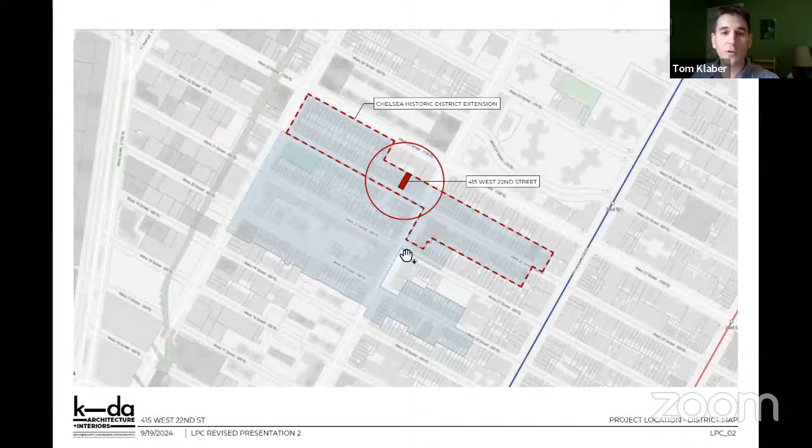So we are located in the Chelsea Historic District Extension on the north side of 22nd Street, between 9th and 10th Avenue, closer to the 9th Avenue side, on a block that is composed of many similar sized buildings. There's a notable bookend building to our east, and then the north side of the donut is out of the district on the south side of 23rd Street.

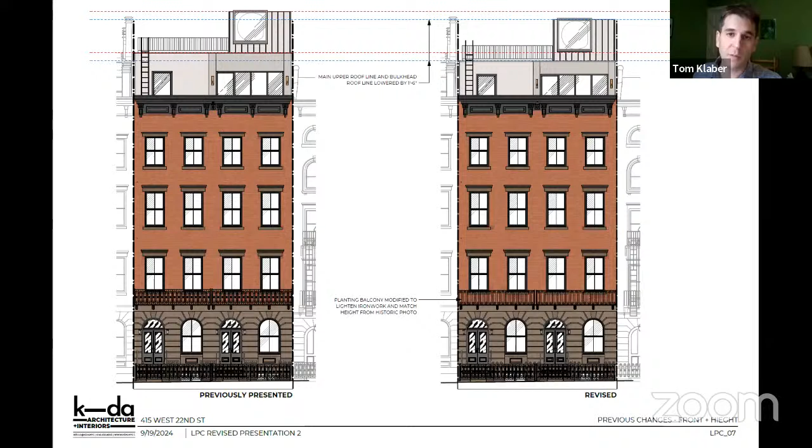So again, to recap the changes that were already made to this proposal, the front facade restoration work, including the changes to the front areaway and restorative work on the front facade, was all supported by this commission, as well as our interpretation of the roof addition, which was supported by this commission after we had lowered it by 18 inches.

The other major change that we had made was the preservation of the internal brick party wall for the first 15 feet of the project on the first 4 floors.

The major change that we had made between our first presentation and our last one, in the rear, that will carry over to today's presentation, is the removal of the 3rd floor extension to bring the entire building above the parlor floor back to its existing building line, and the removal of the floor to ceiling windows on the third floor, and the change of that material back to brick, along with the windows being kept at their original size.

So to take a look again at the existing condition of the rear facade and its relationship to the neighbors, the most notable features to our east is that 20-foot extension at our neighbor at 411, and the balconies at 417, and the fact that 417 extends out past us, and then 419 and 421 extend out further.

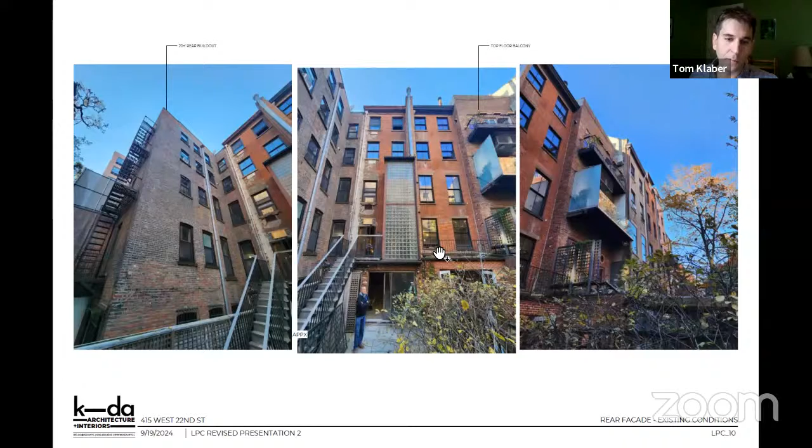A bulk of the work that we've been doing this past month is working with the engineers, the structural and shoring engineers, and the contractors to determine the viability of the preservation of the top 2 stories of brick. We've determined that the facade is in fair condition and is viable to save the top 2 stories.

The condition of the brick behind the chimney is an open question, and there will be some required repointing in sections based on the condition of the mortar on the interior. But overall, it's in fair condition, and the current plan is to preserve the top 2 stories of brick, and then use salvaged brick from below to fill in the various air conditioning openings and any other places that need patches and repairs.

So here is the revised proposal, and we will look at the specifics more closely now.

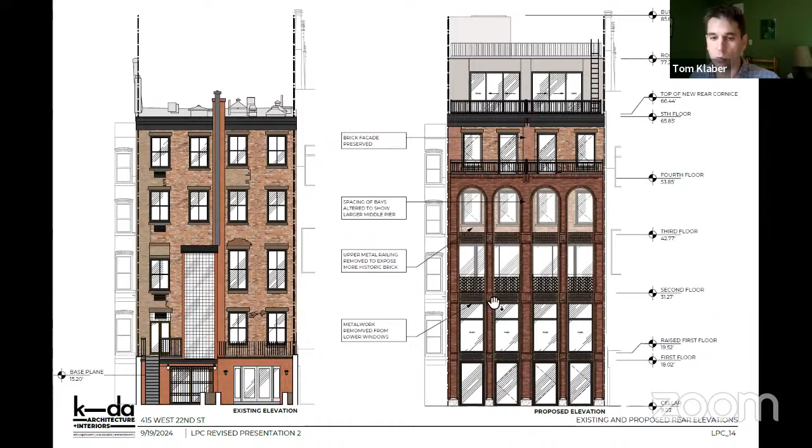So now we can cut this extension away, and we can see again that we're just proposing a balcony on the 2nd floor and a balcony on the 4th floor, and that these 2 top stories are being preserved in place, with the 3rd floor windows being kept in their existing openings.

On the 4th floor, we are proposing to lower the 2 center bays down to create doors out onto that deck. And we are proposing to slightly raise the header heights of those windows to maintain a similar relationship to the cornice, which, if you remember, is being raised slightly as a consequence of the flattening of the roof.

So if we compare this to the previously presented, again, the major change is the preservation of the top 2 stories in place. We've also scaled back the detailing around those windows to better match the existing lintel and sill details.

We have again lowered that top story by 6 inches, and we have removed the decorative metalwork in between, and then reorganized the rhythm of those bays to create the 2x2, all in an effort to lighten up this rear facade.

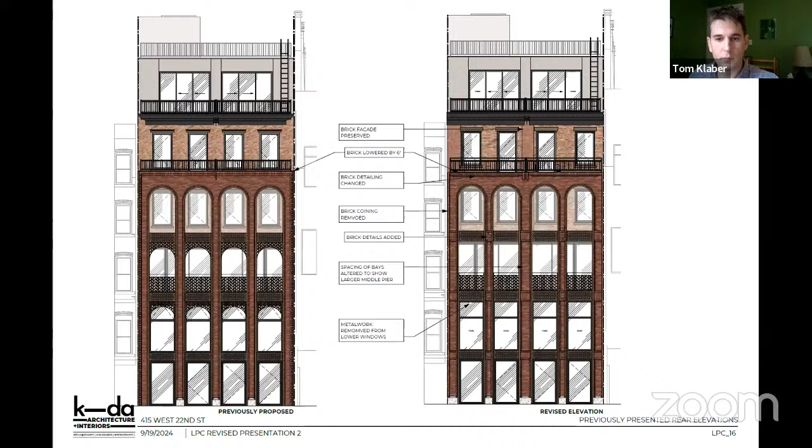The materiality has stayed the same, except obviously rather than reclaimed brick for the top 2 stories as we were previously presenting, that's going to be kept in place and repaired and patched as required. We are proposing here to have stucco for the rooftop addition, and then red brick with the bronze steel metalwork in between.

Here, a conceptual rendering showing the existing versus the proposed.

And here we can see the previously presented and the currently proposed. You can see the simplification of the brick detailing around the outside to help lighten up the overall composition.

So I was told to keep it short and sweet, but be happy to answer any questions.

Great. Thank you very much. It was very well presented. All right. Any questions, commissioners?

Yes, Commissioner Ginsburg. I have a question because it seems to me that the structure from the second to the fourth floor is all a screen, and it does support the balcony up at the, I think, call it the fourth floor. But besides aesthetic preference, is there any reason that all of that masonry frontage is there?

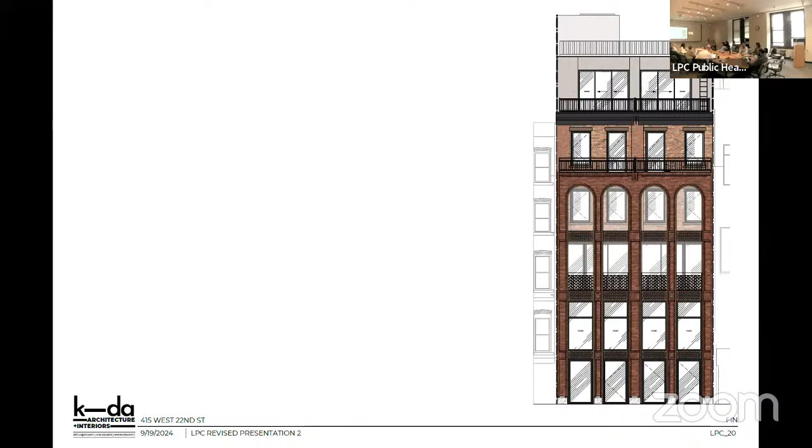If you turn to page 13... I mean, to me, well, that's a fine page too. Or go to, if you look at even what it looked like before, which was a little problematic within context. Can we go back to maybe even before they showed us? I mean, it blended in better than what they have now.

Okay, I'm just trying to understand if it's the sort of the rhythm or if it's actually the height of the arcade. I think, maybe Michael, that would be a question for you.

I would say that this is a case where classical architecture and all of the baggage that it carries is brought to the rear, to a kind of non-classical domain, and it gives the building, at least this is my take on it, and I share the view. I think the view of the courtyard is good because it's such a visually laden image, a laden image of classical architecture that is frontal. And even all the modern ones that we see, they function in a funny way in the rear because they're clearly of a different era and of a kind of more informal quality because of the amount of fenestration. There's something about that very forceful, very well-known classical kind of arcade language that makes it both out of its time and out of its place. I don't know how to say it more articulately.

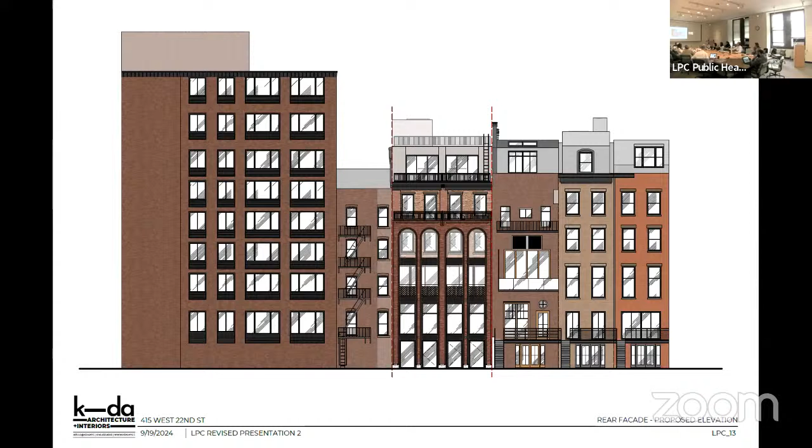Why don't you put up the three-dimensional rendering in the back? Put that one up, whoever's got the screen. Edith, could you move to a different rendering? There it is, yeah.

Yeah, that's what I think. So, if you're not comfortable, we can't vote today. So I think that's the question. Right, that was the thought.

So do you think you can't vote today? I could vote, yeah, I could vote. I mean, I could vote today, yes. Oh, okay, sorry. So then I think we can do a motion to approve.

So Vice Chair Bland, would you make the motion? I will. In the matter of 413 to 415 West 22nd Street in the Chelsea Historic District Extension, this is an application to construct rooftop and rear yard additions, install a cornice and balcony, replace entry infill and fencing, and remove portions of floors and the party wall.

I note that the building style, scale, materials, and details are among the features that contribute to the special architectural and historic character of the Chelsea Historic District. I recommend approval, noting that the proposed work will not damage or eliminate any significant architectural features, and that the installation of front balconies and fencing and the replacement of the modern cornice and entrance infill with elements largely replicating the historic features will help return the buildings closer to their historic appearance.

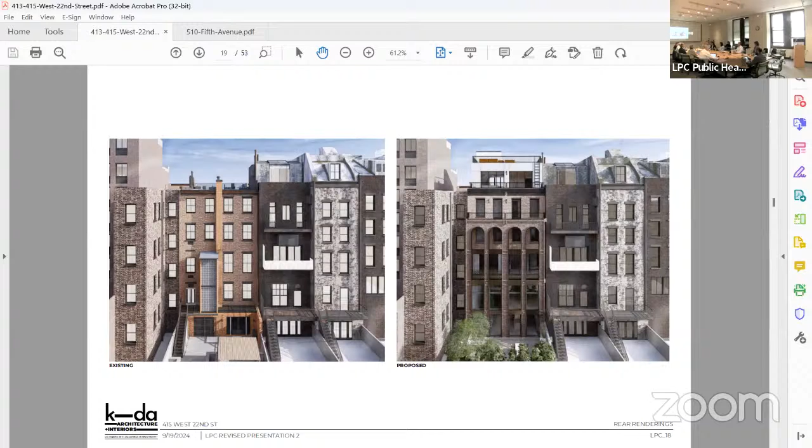We'll start with public hearing item number 1, LPC 25-01949. An application for a certificate of appropriateness in the Borough of Manhattan, Block 1258, Lot 40, 510 Fifth Avenue, the Manufacturers Trust Company Building, an individual and interior landmark. This is an international style building and interior designed by Skidmore, Owings and Merrill, built in 1953 to 54. The application is to install interior signage, LED screens, partitions, and fixtures.

Morning, Commissioners. I'm Cas, I'm with Beacon State Partners. Joined by our clients from Fast Retailing, the parent company of Uniqlo and GU, Hiro Izaki, who is Director of Global Store Development, and Project Architect Kevin Gore. My colleague Sarah Rickle is joining us remotely this morning.

We are presenting this morning a project for a new retail location for the retailer GU, a Japanese brand, which will be occupying the first and second floors of 510 Fifth Avenue, historically the Manufacturers Trust Company building. The project has been designed and developed with 3 key goals in mind, and particularly the first 2 tap into what are the character-defining features of this important landmark.

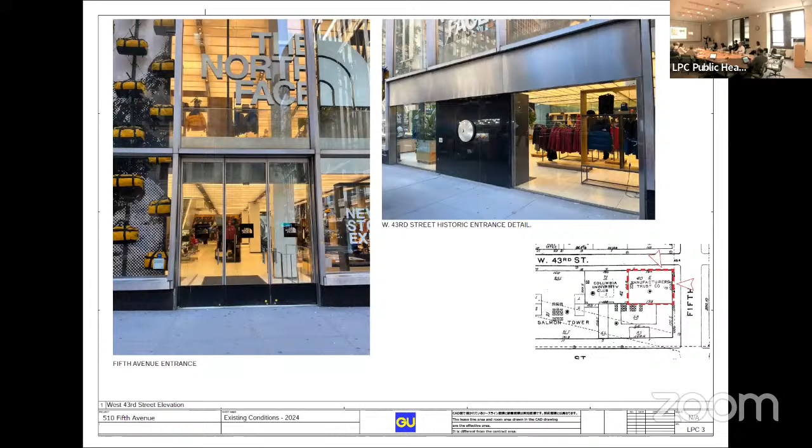And then on the 43rd Street side, the photo on the upper right - this was historically the entry to the building, so the orientation of the public spaces, the first and second floors, has been completely changed. Historically, this was the entry. There's that center granite panel with a night deposit vault drop, but the glass panels on either side were the entry doors, and there was an interior vestibule that led directly to a central escalator, which brought people up to the second floor. That has now been repositioned under the 2011 approval, and we'll talk a bit more about that in just a moment.

There is no exterior work other than decal signage on the doors, and all the work is taking place on the interior. I'll also mention that key to this proposal are enhancements to the artwork on the interior. There are two significant Harry Bertoia sculptures, and a key piece of this project and its planning has been to bring better attention and enhancements to those, which we'll talk about as we go through the proposal.

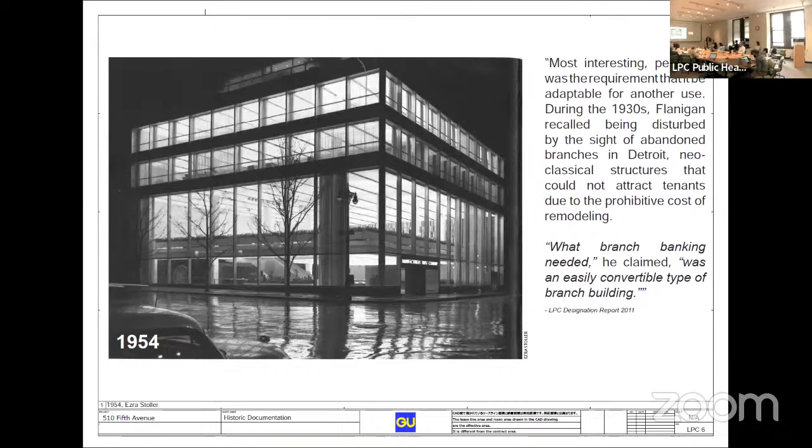What happened in 2010 or 2011, when the orientation and circulation of the interior was changed and the escalator was rotated 90 degrees, that sculpture stayed and today is in its historic location, but it's lost its connection to the escalator. Historically, you came in off 43rd, the escalator was directly in front of you, and as you went up, you saw that sculpture directly above you. Now the sculpture remains in its historic location, but the escalator has been rotated. So part of what we'd like to do as part of this proposal is reposition that sculpture, which actually left the building and came back, so it's again at the top of the escalator, giving you that axial relationship as originally intended.

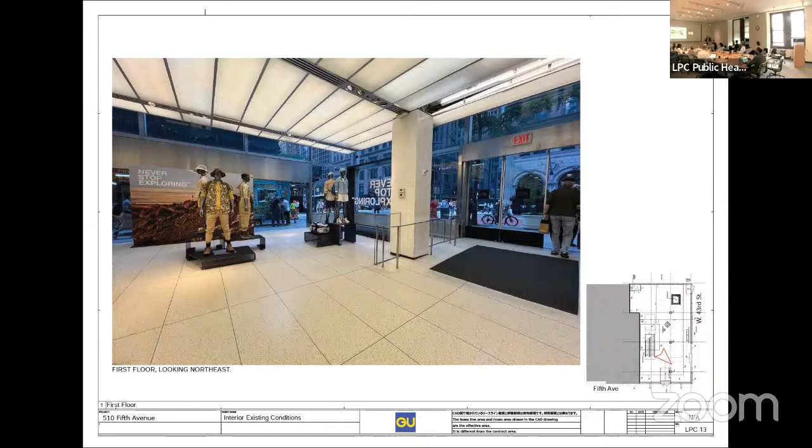So the ceiling I mentioned, that had been replaced in 2011. The floor also, the terrazzo floor, with the moving of the escalator and the condition of the floor, the terrazzo floor was replaced at that time too. So all of the flooring across the first floor and the second floor is 12 years old. The ceiling, the floors, and even some of the column enclosures, particularly those that were supporting the mezzanine, those too were reclad as part of that overall project.

This is a view now looking with your back to 43rd Street across. You can see the escalator now in its current location. Here you can see it in this little key plan, and then this partition wall separating the commercial retail space here, this space here, which is now vacant. There's a wall that divides those with a clerestory above to have some connection. But those spaces, that ground floor space, is currently divided in two.

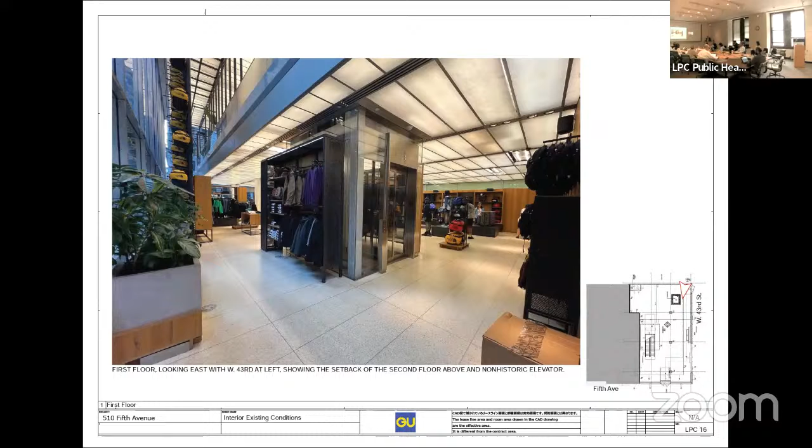And this is sort of looking at that slab edge of the second floor and the curtain wall just to the left of it. But you also get a sense of the sort of irregularity of the ceiling with that fluorescent lighting that exists throughout the space. And then the bank vault.

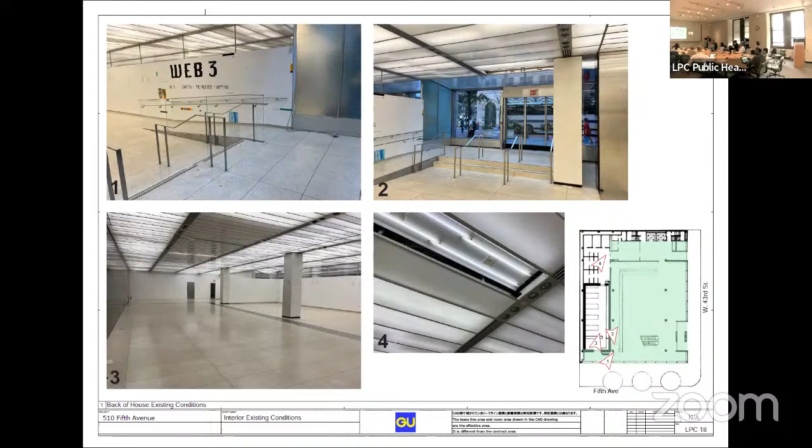Right now there's a black painted wall that's really hard up against it, beyond which is stockroom and fitting rooms, so you lose the transparency of that screen. What we're going to do is take that wall down and move it back for stockroom.

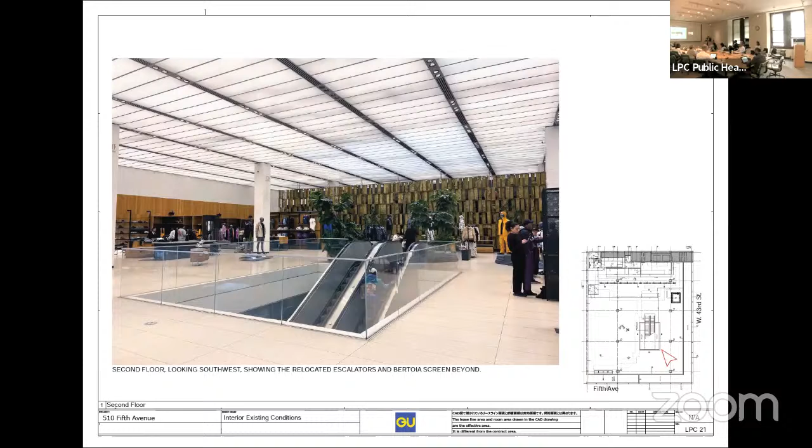So the relocation of the sculpture to the top of the escalator, and also the enhancements at the back of the screen, we think will be real improvements to the space. A few details at the corner, column enclosures, fixturing to the perimeter.

Some additional interior photographs at the slab edge, that glass railing also installed in 2011, so much of the interior fabric is actually quite recent. And then again, the Bertoia sculpture, that's that black wall I mentioned, right directly behind it.

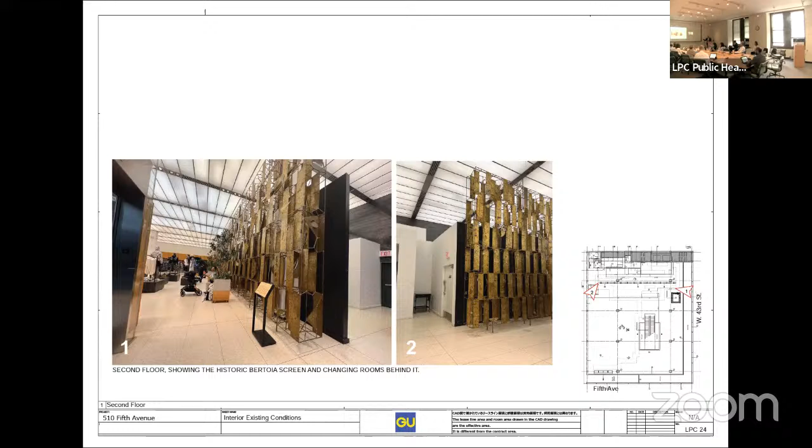As you saw in the historic photograph and plan, the idea was that there was activity on either side of that. There were desks on either side. So we're going to try and reclaim that as part of this effort. So turning to the proposal.

This is a proposed elevation along Fifth Avenue. As I mentioned, other than some small decal signage, there is no exterior work both on Fifth Avenue as well as the 43rd Street side. And the key has been to position fixturing where it is taller fixtures on the back solid walls, lower fixtures around the perimeter. All those fixtures are just clean, simple metal open fixturing.

At the second floor, you can see that on the slab edge. That's about 9 feet back from the facade of the building. In blue hatch is the LED signage that's proposed. It's aligned and tied to the slab edge and the column grid. You can see that in elevation, the relocated Bertoia sculpture shown from that elevation.

And then across the ground floor, you see mannequins. Those are going to come and go. There's no fixturing across the whole Fifth Avenue elevation, so you're seeing directly into the space and even at the corner.

The two key plans represent the first floor and the second floor. There's some small signage, 19-inch square signage that's proposed on the interior on that aluminum stainless steel frame at the entries, both at the two doors. But that's the extent of it. It really sort of serves almost more like wayfinding signage for pedestrians at the sidewalk level.

And then turning around to the 43rd Street elevation, this is the longer elevation at 125 feet. That's that corner sign we refer to as a cube, but it's really sort of an L. A similar proportion or organization, open fixturing along the interior edge of the second floor slab, and then fixtures at the ground floor. There's a secondary entry back to the back of the space, the key plan here, just proposing decal signage on those doors or small scale decal signage.

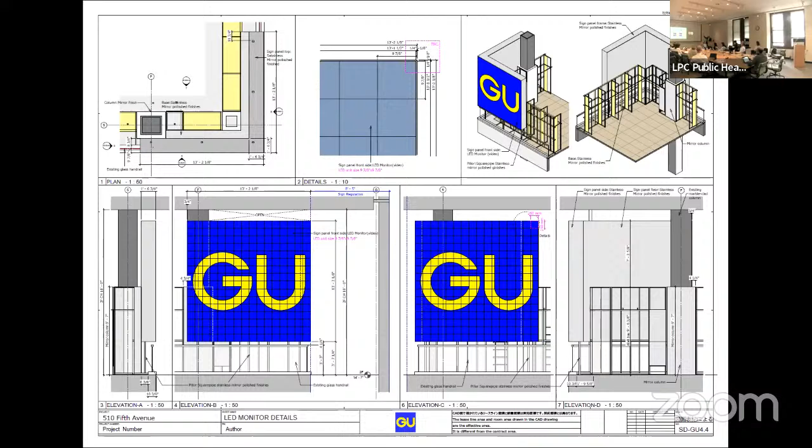So you see upper right, the axonometric views, how it will mark the corner. The column will be mirrored around the base for the retail use, and the current marble cladding all visible on the upper register of these columns, across all the columns on the second floor.

We did this graphic too, I think, just to illustrate again the proportions of these signs. It's interesting to think about the overall elevation at the first and second floors. Looking at the overall area of the first and second floors relative to the sign, this represents 5% of the overall area of each of these elevations—5% on Fifth Avenue and 5% on 43rd Street.

And I know you all, this is something that the commission is wrestling with, this kind of signage. But I think what's interesting is thinking about, I know you all reviewed a project in Ladies Mile last month, the month before, where there was LED video signage approved under that application. And those screens were 18 feet tall, about 6.5 feet wide, but they occupied as a percentage much more area than what we're talking about here.

And obviously the architecture, the international style modernist architecture is very different than that sort of 19th century store and loft structure. But in that Ladies Mile project, one of two bays was occupied by a video screen, so 50%. And on the Fifth Avenue side, one of eight, so 12%. So here, relatively speaking, this is actually considerably smaller in the overall elevation of this building.

And of course, as I mentioned at the outset, the sort of newness of this building, it's very different. It's an interior landmark. It's an individual landmark. It's not a building in a district, but I think the scale of it relative to the overall elevations is pertinent in this discussion. A series of sections now, just to illustrate, this is sort of looking through the escalator,

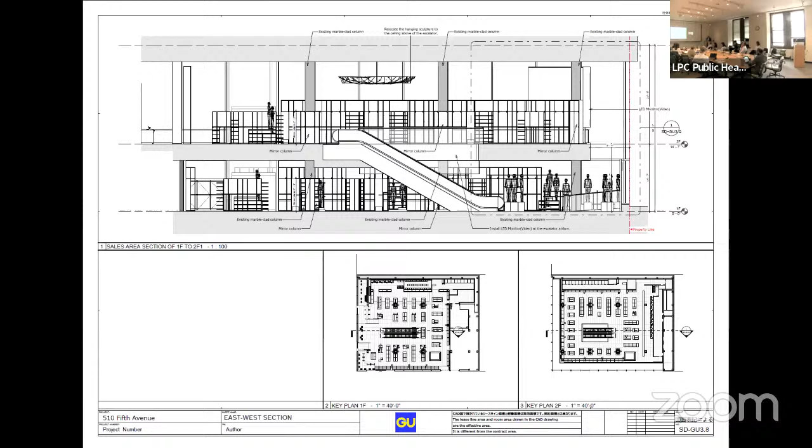the entry off of Fifth Avenue on the right, the repositioned Bertoia sculpture, and then the fixturing around the perimeter. Clearances above all the fixtures on the ground floor. The ceiling heights there are about 11 feet, so there's a little less clearance above those. And then the second floor where the ceiling heights are at about 20 feet, significantly more clearance above there.

Some details on the fixturing, sort of how they're going to be positioned around the columns. There'll be mirrors integrated into them. Lighting will be integrated into the fixtures themselves to minimize attachments and things like that to the columns. Speaker strobes, things like that, those will be required. We're working those out as to where those will be located.

Around the escalator opening, we're also proposing an LED monitor that would animate that section. So again, this is the new location of this escalator. So as you're passing from the first floor to the second floor, that interior slab edge, again, all new fabric, building fabric, that interior slab edge would have a video monitor around the perimeter just to bring a little bit of animation to this place of motion going from the first to the second floor.

Looking at some of the fixturing, some LED neon signage integrated into the fixtures for wayfinding and things like that. This is located in the back corner of the second floor, just to guide people around this fairly large floor area.

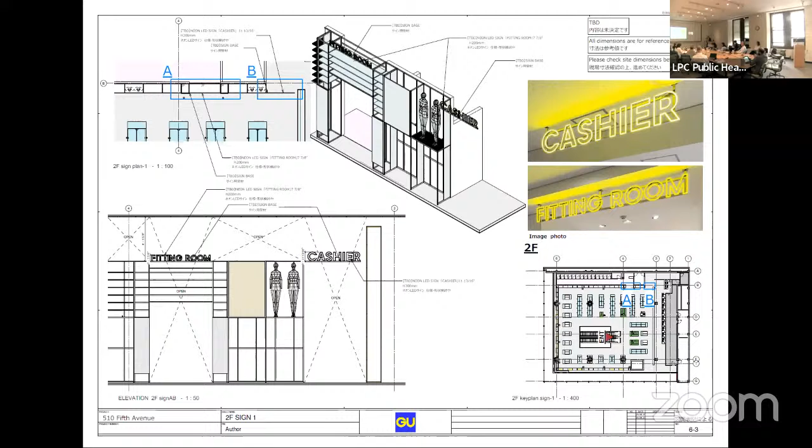Some other details. This is the back wall now of the second floor. So again, this is the stock room here, and you can see this is the granite of this back wall that remains. So this will be built in front of it, and then the cash wrap. This is all behind the Bertoia screen, and then the historic fabric, the granite directly above that, visible above the new construction. And then a series of renderings.

So you saw this view. This is along the Fifth Avenue side. So what we've done here is we have the image here with just the GU, and you get a sense of the views into the space around the sign, obviously, and then flipping it to some other imagery that could be on this sign.

So I think this would be a video screen, as we mentioned, so there would be some animation, but I think seeing it in the context of the ground floor space, it is obviously in its form sort of compatible with the cube-like nature of the building itself, but also really allows for views in, which is really the key goal of the way this has been designed.

Corner view with the static GU or a different image. And I think the corner fixturing has been held away from the corner in its entirety, so you'll be able to see directly into the ground floor. And then, of course, at the second floor, you can see over.

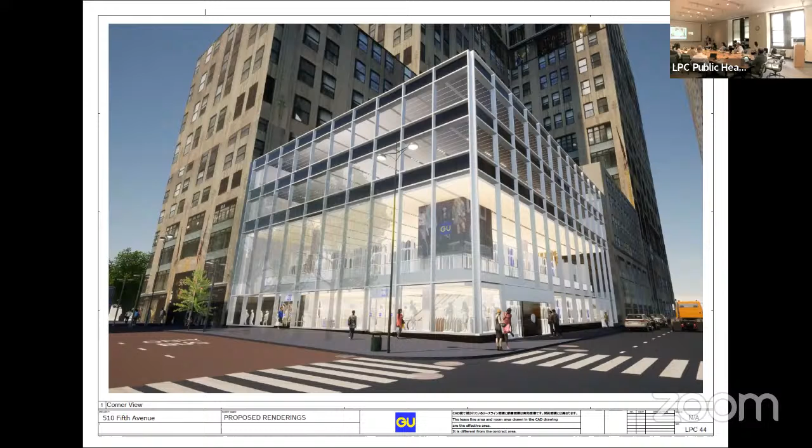This sign at the corner is set 8.5 feet back from the perimeter. We think that's a significant number that's just at the slab edge, but it's held back from the property line, which is a significant dimension.

And then the 43rd Street elevation, fixturing along the ground floor. Again, you can see through, if you look at this, you can see the escalator and the motion that will come with that. And at the second floor, the two Bertoia sculptures, and then the signage at the corner.

I think it's significant too in this view where you see the corner sign, you're seeing through the curtain wall system. So with that 8.5 foot setback, it doesn't interfere with the perimeter architecture of the building. It's really an independent feature that operates in conjunction with the new material and new elements that are part of the new retail use.

A few renderings on the inside, the ground floor looking at the escalator, the new sort of even luminous ceiling, and then the fixturing around the ground floor.

At the second floor, the repositioned Bertoia sculpture looking at the perimeter, the open metal frame fixturing around the perimeter, and the backside of the corner sign, which will be finished in stainless steel.

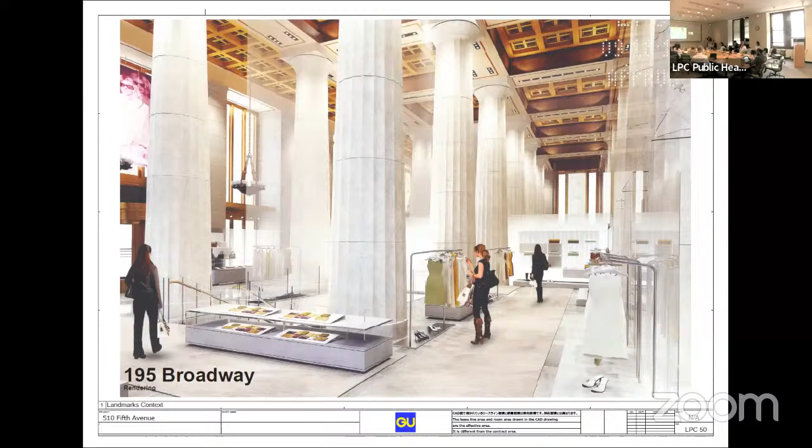And then a view looking west, again with the two Bertoia sculptures seen in conjunction with that video screen around the slab edge of the escalator.

Just for reference, we also took a look at the way some of these challenging interior spaces have been adapted for new uses, with three examples here where the commission has accepted new uses within historic spaces.

This is the lobby of the AT&T building at 195 Broadway, where the commission approved a master plan for retail installations, which included fixturing and wall partitions up to 8 feet, and perimeter lit signage.

This idea that these additive features can be found appropriate in historic spaces where the spaces still read very clearly. This is a 30-foot tall ceiling, so there may be obstructions at eye level, but you're always able to see over those to the ceiling.

That's not unlike what is planned for at 510 Fifth Avenue. This is a perimeter view. These are what were referred to at the time as lanterns—internally lit hanging signs around the perimeter of the ground floor, on Fulton, Broadway, and Dey Street, marking each of the retail spaces.

Currently, Anthropologie is in one space, Nobu is in another, and one of the three spaces is actually still vacant. Some other interior views, again, where you see this high partitioning, the signage, fixturing across the floor, but still views around the space and of the historic features.

Bridge Market is an exterior landmark, but the interior, in part because of the Guastavino ceiling tile, is considered almost like a landmark space. So the way this has been regulated for market use, again, relatively tall fixtures, which at the ground level obstruct views but allow you to see over them to the ceiling.

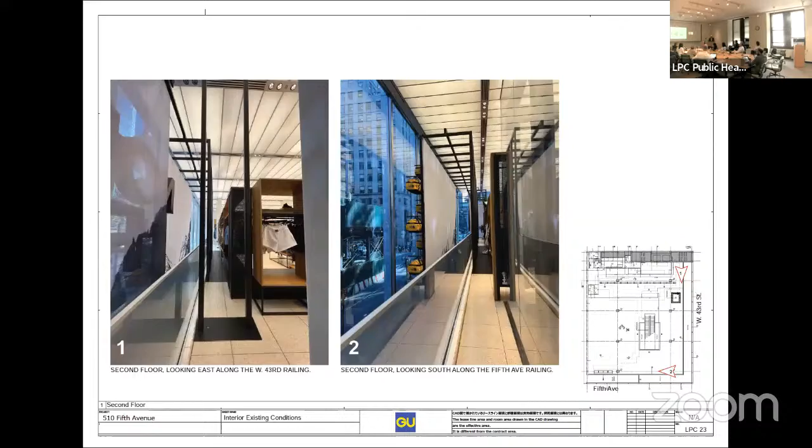Oops, it's there. Yeah, so it's higher up. That might be 8 feet square. I'm not sure what the dimension is.

Their signage has changed. We've been talking with the staff about our application for months. Our understanding is that the North Face has changed their signage, perhaps not always per the permit, so take some of that with a grain of salt, but the way they merchandise - this is the approved signage that was first installed by the previous retailer. They reused that, then added signage, and there's more solidity to the way they treated the perimeter, even today, with the framework they hang merchandise off of and sort of screen signage.

Thank you. Yes, Commissioner Goldblum. Corey, what is our jurisdiction regarding fixtures? Let Gloria and Mark take that, instead of describing the fixtures. Typically, the commission has jurisdiction over fixtures that are actually fixed to the ground, and also things that are generally deemed not movable, right? So it's the gray area.

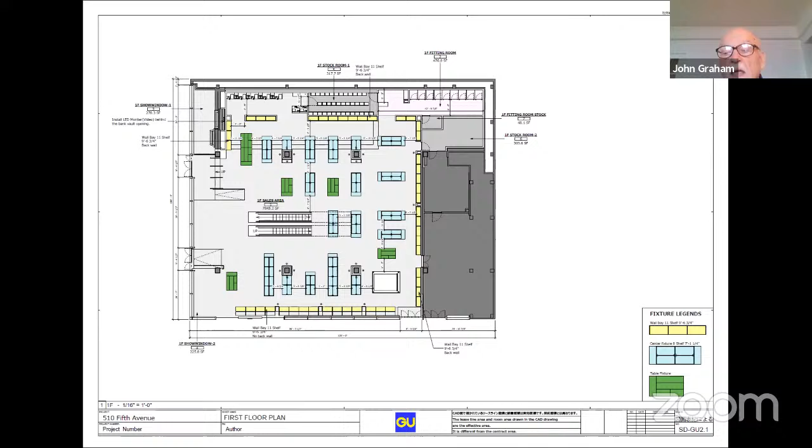Finally, we have often testified against the use of overly large LED signage and display units placed where they block views into retail spaces at buildings within historic districts. We believe this is much more destructive in the case of an individual landmark celebrated for its transparency. The applicant should reduce the two blue 13-foot tall LED signs proposed for the northeast corner and reconfigure the display units to maintain transparency. Thank you, Commissioners.

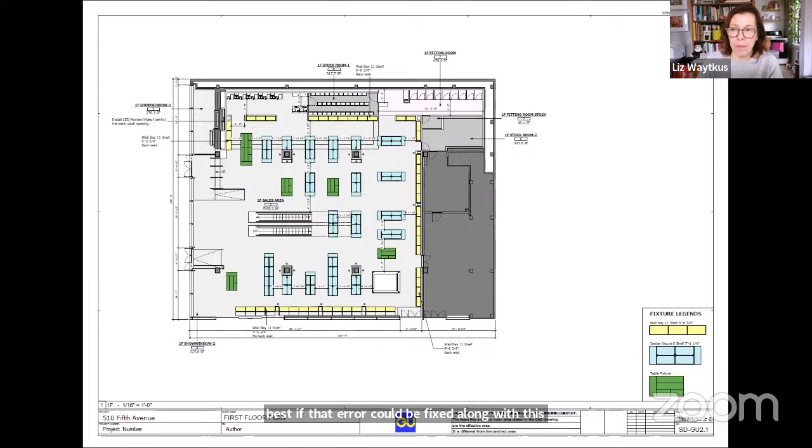Thank you. Hi, Commissioners. My name is Lucy Levine, speaking on behalf of the Historic Districts Council. HDC appreciates the applicant's apt point that this building was built to be adaptable to uses beyond banking. We support adaptive reuse here and citywide.

We also note that in addition to being adaptable, this building was designed to have an inviting look, which is part of why it was conceived as a transparent glass box. Pedestrians could see in from the street directly across the interior expanse of the banking floors. For that reason, we find the proposed wall-based shelves positioned directly against the windows inappropriate. They don't allow pedestrians a view across the building's interior and thereby disconnect the interior from the street. We ask that the applicant move the proposed wall-based shelves away from the windows.

We also have concerns over changes regarding the two historic sculptures by Harry Bertoia, including the need to move the extremely fragile cloud sculpture to a non-historic location and removing some of the existing protections around the wall sculpture.

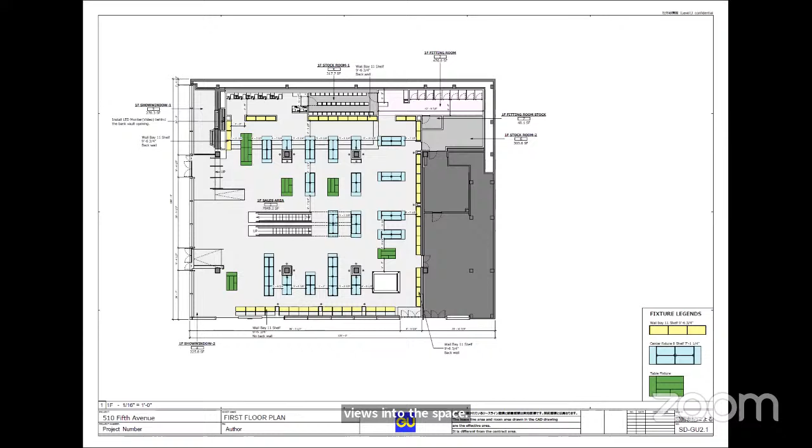The applicant has referred to their alterations as being highly transparent, but I would encourage the commissioners to look at the original Ezra Stoller photographs and compare that to what's being proposed and what currently exists. You'll see that a lot of the interior is obstructed from the street, and I know this is an interior landmark, but the separation between exterior and interior is so inseparable here that so much has been lost with prior alterations and what's being proposed.

I think eliminating the vertical shelving along the second floor would do a great amount to increase transparency. The other point that others have raised is the relocation of the Bertoia sculpture to a new place over the escalators. I get the intent there, but I think there's a wide consensus now that the relocation of the escalators itself was not a winning move in the 2012 alterations.

And I think bringing it closer to the larger screen changes how the viewer experiences the sculpture, which is the cloud sculpture, that is quite delicate. It consists of hundreds of steel wires, and I just don't think relocating it does it any favors. Thank you so much.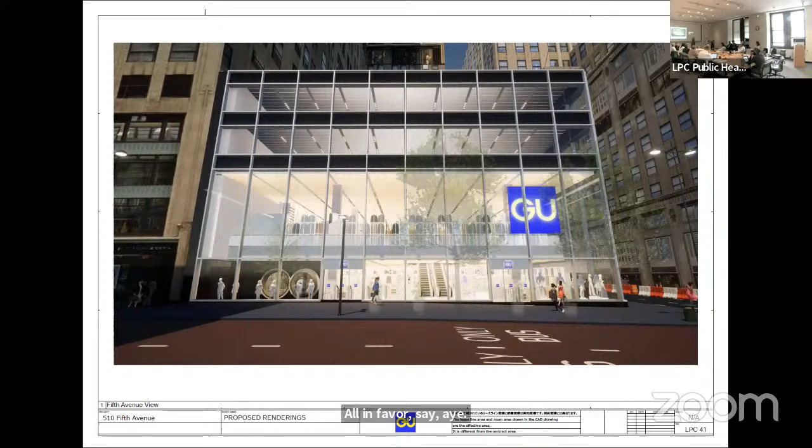We have a number of components to discuss on the exterior of the building. The only thing proposed are small decals at the entry doors. On the interior, there are fixtures that include tables, open-backed 8-foot high shelving, and then 9.5-foot shelving and 13-foot shelving that have backs. I think the 13-foot ones are all against the back walls of the space.

There's also the relocating of the Bertoia sculpture. And then finally, on the interior signage plan, we have non-illuminated signs right behind the entry doors, the cube sign at the corner, and then LED signs integrated at the second floor slab of the escalators and also integrated within some of the fixtures. So we'll try to cover all of those aspects of the project in our discussion.

Commissioner Ginsburg, would you start this one?

Yes, I've walked by the building many times, and I think it may have been conceptually designed to be totally flexible for other uses. But I think what we're dealing with now is an individual and interior landmark that doesn't work as its original use. So clearly it's some sort of retail at this location, and I think there's a lot positive to be said about this proposal. I think the point made, having walked by it, it did look often more like a showroom than a retail space previously. So in general, I think this is good. It's been thoughtfully done. It makes sense.

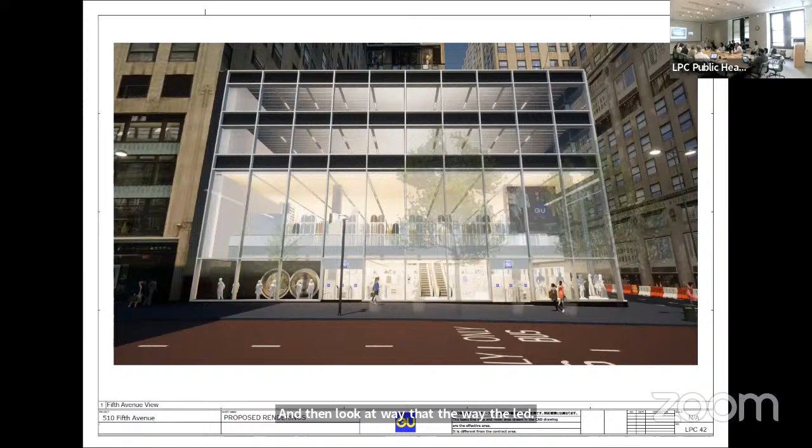And that's partly because it's LED signage, but it's also because you've got two right together, and LED really jumps out at you. So I'd like to see them work on that signage issue on the corner.

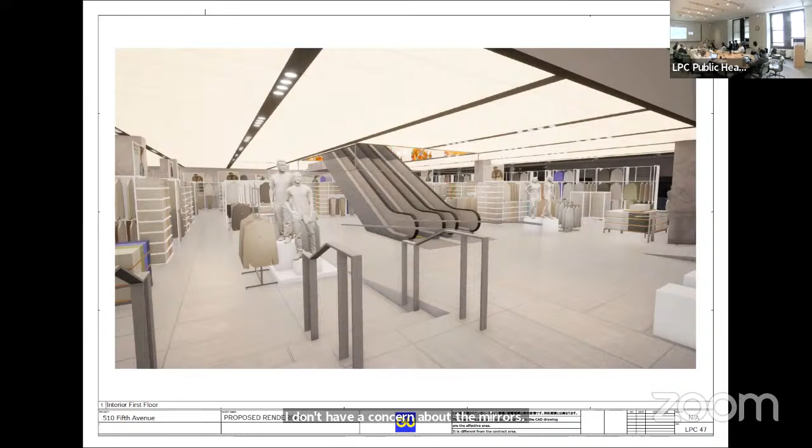So now, the problem with the job that I have is the fixturing. What you have here, both on Fifth Avenue and here on 43rd, is a 9.5-foot high wall that sits at the perimeter of the entire building, except for an area along Fifth Avenue, on the second floor and on the first floor. What you're seeing, both on the second floor and on the first floor here, is the backs of displays that are relatively close to the street, that you will see from the street, well lit from the street light. And if you ask me, that's the biggest problem here.

The fixturing is fatal for me. It has to be turned 90 degrees if it's going to be this high. It has to allow for penetration of your eye into the space, not the creation of a wall, a 9.5-foot high wall at the perimeter of the entire second floor balcony and the entirety of the 43rd Street facade. Notice it's 3 tiers of clothes high, 9.5 feet high—I think that's very tall. And as you can see from the north face layout, which is the same deal, you basically see this armature of metal right up against the side, so one's sense of being able to visually penetrate into the space is blocked.

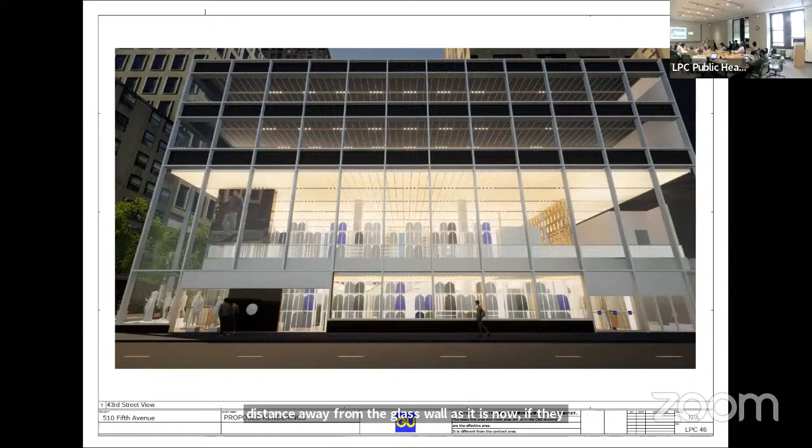Number one. Number two, I think that the Bertoia sculpture needs to stay the same distance away from the glass wall as it is now. If they want to center it on the new escalators, I think that's fine, but it should stay in the same line that it was historically. I think putting it where they're proposing puts it in a way that's competing with the Bertoia wall.

And yes, there was an axial quality to it before, but again, that cow has left the barn. I think the goal for us should be to maintain a kind of relationship between that sculpture and the street. So I think the project has many good qualities, but without a significant change to the fixturing, I can't support it.

Okay, all right, thank you. This has been a really great discussion, and I want to thank all of you commissioners for focusing on all of the work. I think that we have a majority of commissioners who can support this project with some study of the size of the corner sign. I think for some of those commissioners who supported it, the mirror cladding on the bottom half of the columns.

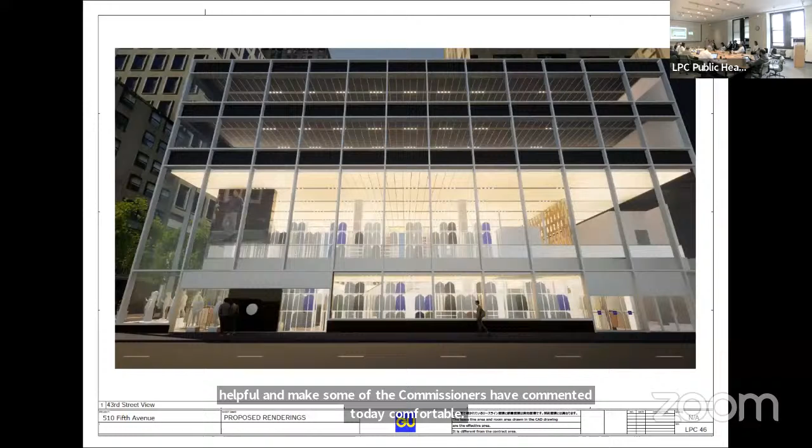So I think we'll take no action and have you work on those three areas. There have been some suggestions about how to explore the shelving, either turning them or flipping the lower ones and the taller ones. I'm sure the staff can work with you on other ideas as well, because I understand you have to be able to merchandise and market. So we have to find that balance. We'll take no action and see you back as quickly as we can.

All right, thank you. Can I just say one thing? Vice Chair Bland: I think from a citywide perspective, having GU come and take this difficult spot—43 is almost 42, and Fifth Avenue was once center of gravity, it's now moved up a little bit—but to have you come in and take over two floors at a time when New York is still reeling a bit on retail street level access, and to lose retail at the street level for any city is a disaster, but for New York it's unthinkable. I think this is just a great sign of belief in New York that you'll come and do this. So I just wanted to say that. I meant to say it early on, forgot.

Yeah, and I completely agree. I think we're talking about tweaks here. This is generally the overall approach, and it's been really sensitive and respectful, and we're just talking about really tweaking. Again, looking at size or location of that corner sign, I really do think dropping it would allow a view of that ceiling, which we've all talked about as being really important to this space. So this is just sort of final refinements and tweaks, and we'll have you back very quickly. Yeah, especially from all the way across the ocean, as a vote of confidence of this city. Yeah, yeah, all right, thank you.

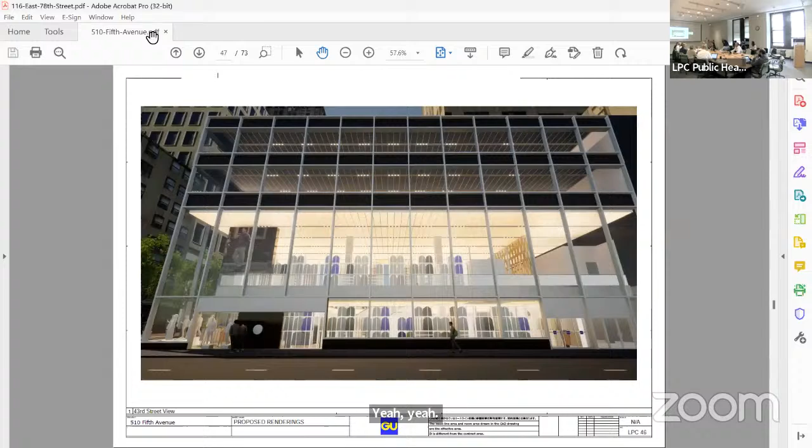We'll move to the next item. The next item is public hearing item number 2, LPC 24-11800, an application for a certificate of appropriateness in the Borough of Manhattan, block 1412, lot 164, 116 East 78th Street in the Upper East Side Historic District. This is a row house built in the 1860s and redesigned in the Neo-Georgian style by Rouse and Goldstone, 1909 to 10. The application is to legalize excavation at the rear yard in non-compliance with certificate of appropriateness 12-445, LPC 12-3560.

Good morning, everyone. My name is Mark Alberton. I am the architect of record for this project, 116 East 78th Street.

This application is to request the legalization of the as-built condition of the rear courtyard and excavation of the project. The LPC issued violations involving the excavation below the rear courtyard and reduced green area within the 5-foot space of the rear property line. Due to some confusion over approvals and a clerical error, the post-approval amendment was not cleared by LPC for approval in 2019. This is why we are requesting the as-built legalization. I'll go through the presentation quickly, as I know there's a lot for you to talk about today.

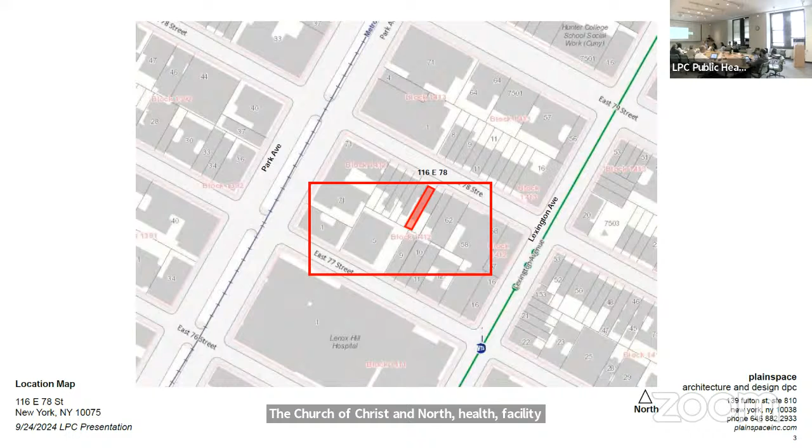This is a local map of the block. The house is within the mid-block of East 78th Street between Lexington and Park Avenue. The Anderson School is to the east of the property. The Church of Christ and Northwell Health Facility is to the south within the block. And there's a large multifamily building on the Park Avenue side to the west.

This is an overhead image showing the neighboring courtyards. As you'll see, there's no internal common green areas as in other parts of Manhattan. There's no grassy areas within the block. Each property has its own definition of landscape. And some of the buildings are continuing up to the property line in the rear of the properties.

This is now some close-up views of the rear yard. Ours, the 116, is in the center here with the trough. There's no green space in any of the properties except for the 114 to the west of the property, which has never been renovated since the original building was built. To the rear, south of the property, is the church garden, and then the Northwell Health Facility is to the south without a rear garden.

So under our space here, which is in the center, there's an excavated area below the courtyard with limited planting area within the courtyard, within the 5 feet of the rear lot line, which was flagged as unapproved.

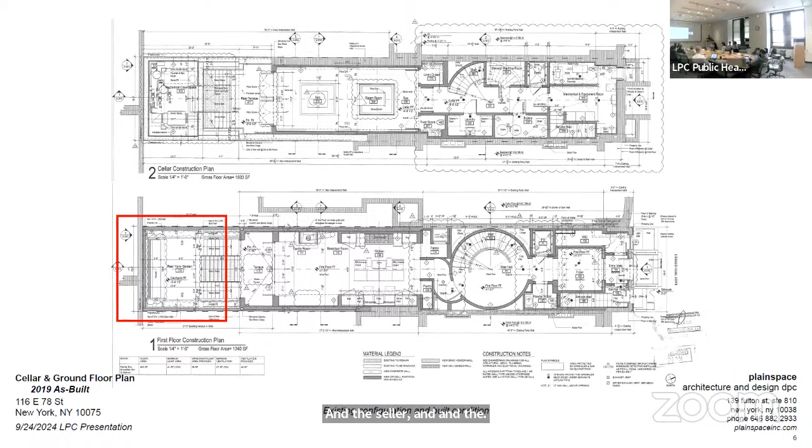So on the floor plan, you see there's a mechanical space and courtyard, and the cellar and the ground floor. And the mechanical space does indeed expand to the south lot line. The services of the cellar of the house. The courtyard was intended to have a fountain, but the completion of the fountain was canceled partway through construction.

Here's a longitudinal section of the building showing the as-built excavation constructed all the way back to the south property line. And then a more detailed view of the courtyard terrace. The surface and height of the courtyard match the original project approvals and all subsequent amendments. The landmark requirement is to maintain a 5-foot planting area from the south property line into the property.

So our request is to legalize the as-built condition and not remediate with demolition. The courtyard currently includes 2 3-foot deep planters along the east and west lot lines for the full length of the courtyard, meant to have tall plants that protect the east and west sides of the courtyard.

The mechanical equipment below the courtyard services the townhouse cellar itself. Removing this area would be very detrimental. It's heavy demolition and noise. The mechanical equipment inside this area would require relocation or abandoning piping, equipment, and infrastructure. The demolition and reconstruction would start construction again for another 8 to 10 months. After 13 years of construction on this project, it would be a burdensome reopening of the job site.

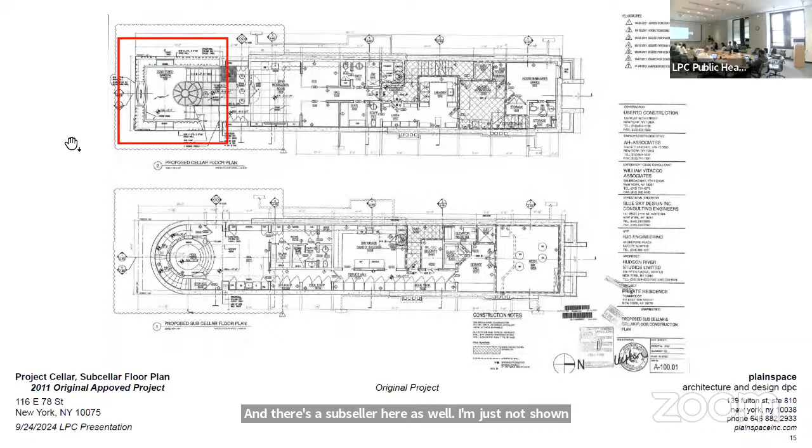This is the 2011 landmark approved plans from Lee Harris Architect. It shows excavation of the cellar, and there's a sub-cellar here as well, which is not shown here. The courtyard garden has perimeter plantings with an area here which is lawn. Here's a more detailed sectional view showing the excavation of the sub-cellar and cellar, and again a more detailed view showing this lawn area, the hedge, and the two cellar levels below being excavated. That was approved by landmarks in 2011.

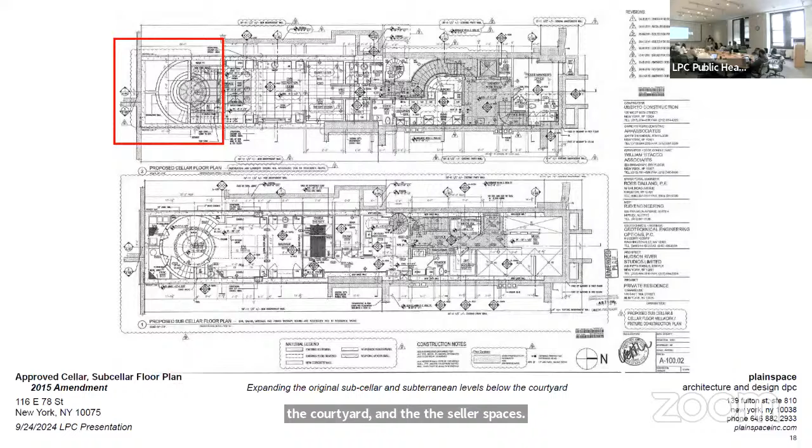In 2015, there was an amendment to extend the courtyard and the sub-cellar spaces to the south property lines. Here's again a section of that approved amendment, showing the full excavation of the cellar and sub-cellar.

This is in 2017, another amendment that was approved by landmarks. Essentially it shows the hardscape with perimeter planting and the fountain in the rear yard. However, this plan removed the sub-cellar and cellar, so the excavation was limited only to the footings and foundation of that area. This again is a detail of that section of the 2017 approval.

This is now the 2019 amendment submittal, which returned the 2015 approved excavation portion of the courtyard with the plantings on east and west side. I'm indicating here this green space, which could be an option for a remediation idea of the 5-foot green space. But again, the excavated space goes back to what was previously approved by landmarks.

And this is again planned. The green area is an option to do planters, or perhaps we can bring back the fountain, or somehow make reference to the 5-foot requirement. By the way, the 5-foot green area requirement would extend almost halfway into this terraced area here. The distance between this point and the rear property line is about 3 feet 9 inches.

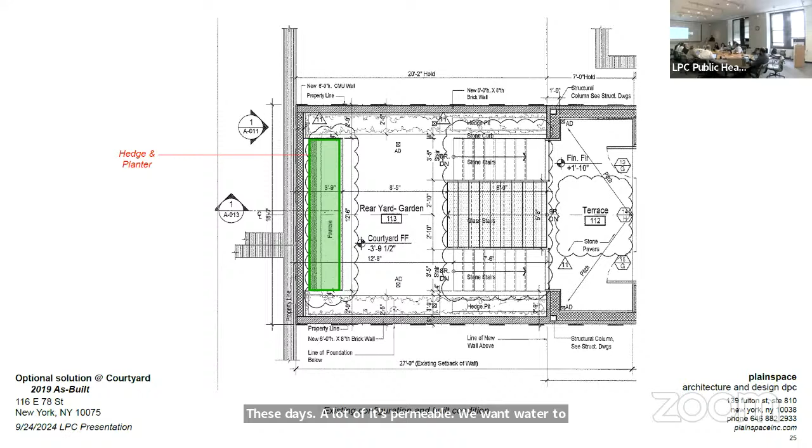The paving itself is generally not something we regulate heavily. These days a lot of it's permeable, we want water to drain through, it's just pavers. Sometimes it's engineered though, over a concrete slab with footings that go out to the lot line, and it's more about that part, that it's engineered to the extent that nothing could grow, a mature tree or anything like that. It's less about the paving itself on the yard instead of grass. Any other questions?

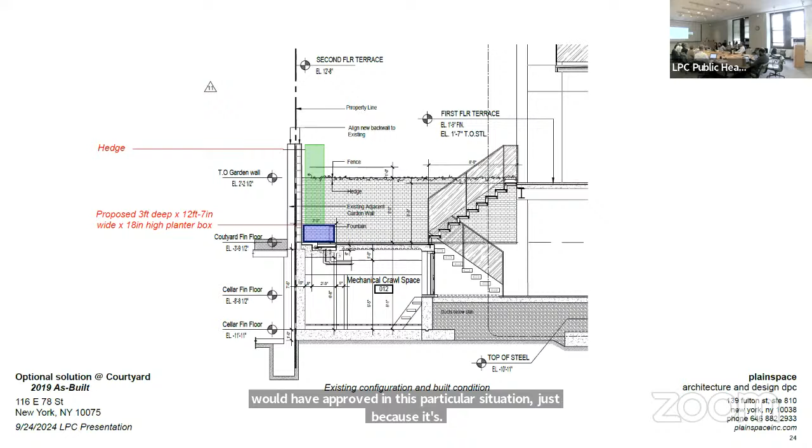Looking at the history of this, it seems to me the actions were not necessarily an intentional violation. Looking at the situation, there is no real backyard, no green space to be preserved, and the grade matches the adjacent rear yard. So I think this is something we would have approved in this situation, since we approved something very similar originally anyway, but we would approve it at this point if it came before us. So I can support the legalization here.

Okay, thank you. Commissioner Lutfy? I can also, for the reasons Diana said. Commissioner Master? Yes, I agree with Commissioner Chapin. Commissioner Goldblum? Okay, does everybody else agree? Okay, great.

Then I think we'll make a motion. Commissioner Chapin? Yeah, thank you. In the matter of a certificate of appropriateness, Borough of Manhattan, LPC 24-11800, 116 East 78th Street, Upper East Side Historic District, a row house built in the 1860s and redesigned in the neo-Georgian style by Rouse and Goldstone in 1909 to 1910. The application is to legalize excavation at the rear yard in non-compliance with certificate of appropriateness 12-4445, LPC 12-3560. I note that the building style, scale, materials, and details are among the features that contribute to the special architectural and historic character of the Upper East Side Historic District.

I recommend approval, finding that the excavation of the rear yard was conducted in compliance with Department of Buildings regulations and did not damage the structural integrity of the building or adjacent buildings, that the grade of the rear yard was retained and matches the grade of adjacent rear yards on the block, that the block is densely built up, featuring a variety of building types of different sizes and lot coverages. Therefore, the excavation to the rear lot line did not diminish the central green space, and there is a planter box providing greenery, and the work did not detract from the special architectural and historic character of the building or of the Upper East Side Historic District.

The next item is public hearing item number 3, LPC 25-00039, an application for a certificate of appropriateness in the Borough of Manhattan, block 1383, lot 63, 12 East 69th Street in the Upper East Side Historic District. This is a row house designed by William Schickel and built in 1883 to 84, redesigned in the neoclassical style by William Wells Bosworth in 1913. The application is to replace entrance infill, lower the areaway, enlarge a masonry opening, modify the rear facade, rear yard and garden wall, and construct rooftop additions.

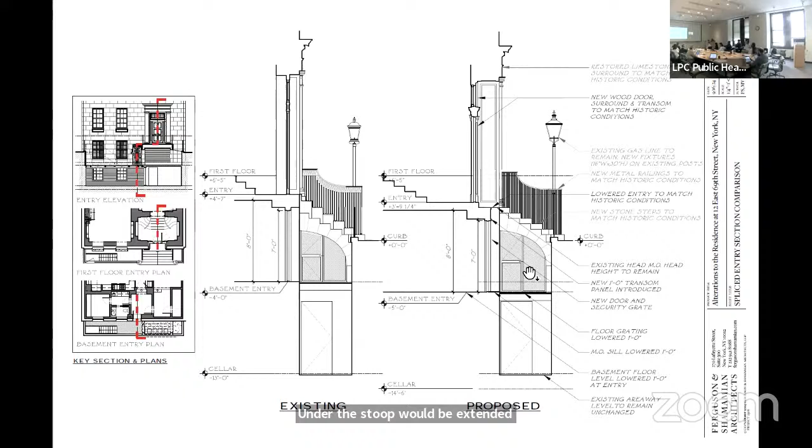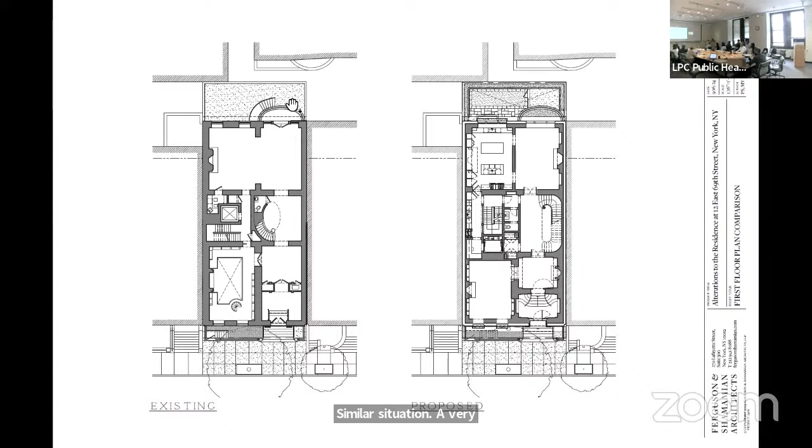Moving to the rear, we have a very small rear yard. We're looking at a similar situation—a very small rear yard, all paved in concrete currently, and we'll be looking at that in detail.

At the rear yard—here's the rear yard, the paved concrete area—the access to the rear yard is through the basement. This is the basement door, so you come down the stair, and we'll be reconfiguring all of that as part of the new proposal.

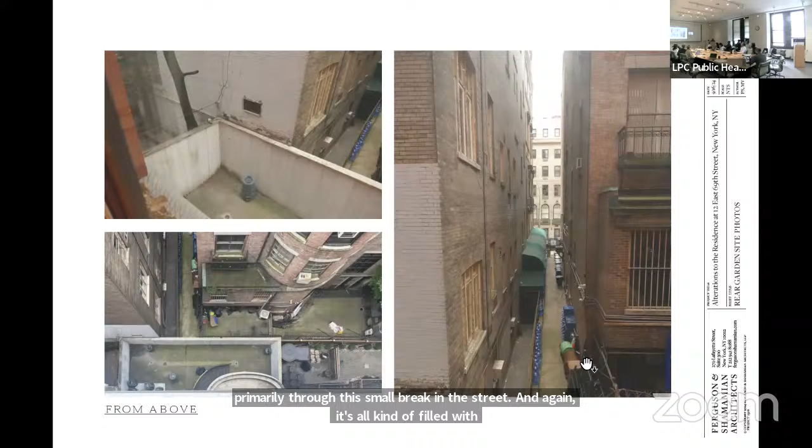And again, it's kind of filled with utilitarian goods like trash cans and water bottles and awnings. This is very much a space of utility.

So the overall proposal of the rear elevation, you can see the existing condition on the left, which has that stair down to the existing rear yard level. The proposal is to add a terrace. This will just be a deck that's added at the basement level to provide direct access from the house out to that yard level and give it a little bit of outdoor space. The area to the west would not have the deck. That's going to be for isolated mechanical units.

And then modifying masonry openings at the basement level and first floor, you can see these, but very much consistent with the overall fenestration pattern, just an enlarged opening, punched opening with multi-light windows. This is visible from that alleyway, from the break in the street wall, which is why you're looking at it today. Otherwise, it would meet staff rules.

And then up above, relocating that last line between the 2nd and 4th floors of the rear facade. Up above, we have 2 small shade structures that we'll be taking a look at, and modifications to the mechanical and the bulkhead.

So in section, that deck that we were just talking about sets up about 4 feet from existing grade and allows for direct access again from the basement level out to the rear yard. The existing concrete block walls will remain. There'll be a garden screen. It's lattice work or treillage that will surround the yard.

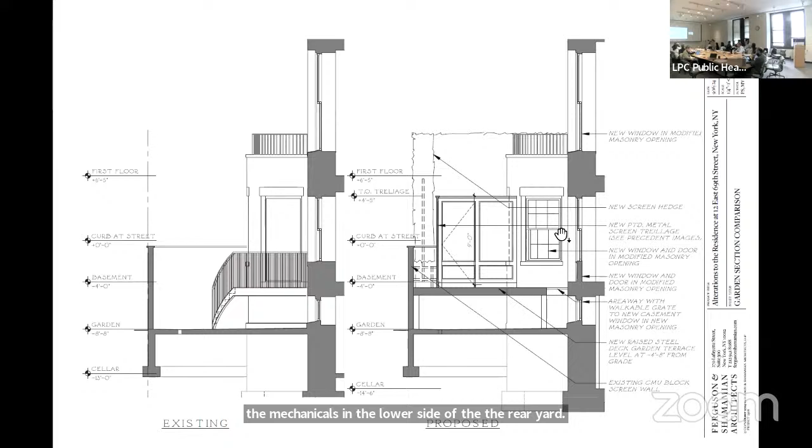And so at the roof, the proposal is to reconfigure the existing bulkhead. So it's going to orient toward the north, extend down to the north a little bit more. All of the mechanical will be integrated into the bulkhead and above the bulkhead. And this is the mechanical plan here, all with little or no visibility. There's also a mechanical screen added here with another unit at the roof level. There is lattice work proposed along the perimeter of the parapets, and then the two small shade structures at the rear, and a new skylight which is below the parapet level as well.

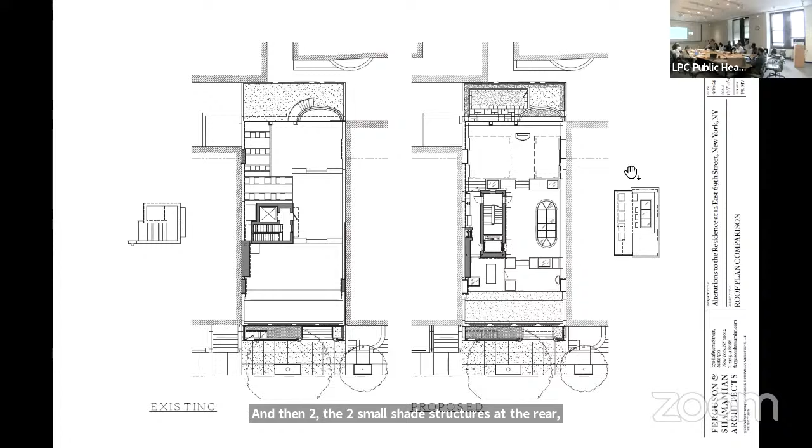In section, it looks like this. You can see the existing pitch of the roof, it's all maintained. This area below the roof is becoming a mechanical attic. And in order to accommodate that, there's going to be a small soffit that drops down across the 4th floor windows, so that is located right there. But otherwise, we're looking at the shade structure and the newly configured bulkhead and mechanical in the distance here, and then some of the lattice work trellises.

And then in detail section, you can see the shade structures have a sort of felicitous design to them. They'll have a metal roof structure and then be open with just posts. It'll all be finished this gray-green color. We'll take a look at that. And then the bulkhead will be clad in stucco, but recalling a limestone configuration. It has a cornice. It's all designed and very much consistent with the overall design of the building, and really something that rises to the level of the grandeur of the house itself.

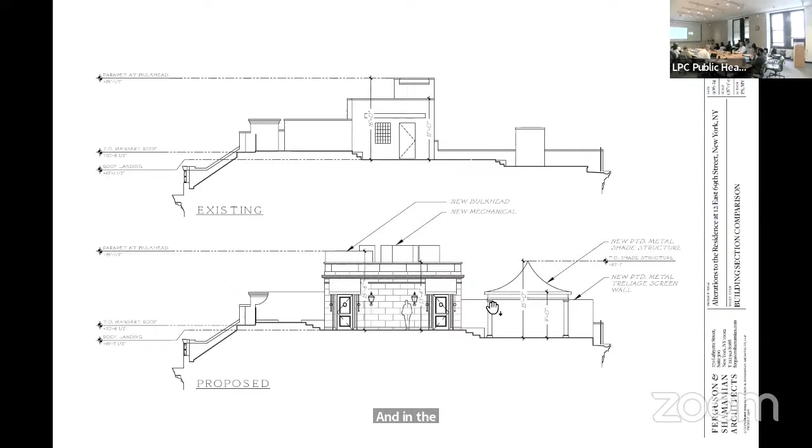And in the section, we can see the cutback of the treillage, and then at the rear as well. Back here, this is the mechanical, the elevator overrun that's going to pop up above the stuccoed bulkhead itself. That will be clad in zinc, so it will go away. We have some distant views where we pick up a little bit of visibility, and so the zinc is meant to really recede from view, and then mechanical beyond that.

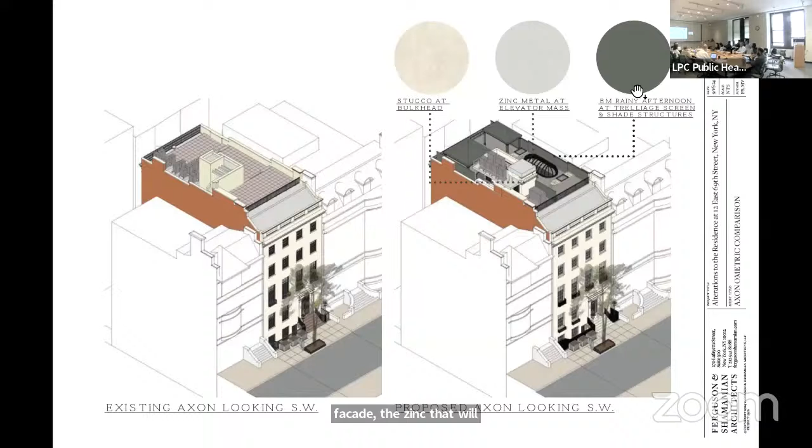Section looking the other way, showing that elevator overrun. And then in axon, so the existing condition on the left, we have all that mechanical and the existing bulkhead. And so the new proposal has the redesigned, reconfigured bulkhead, skylight, and mechanicals, and then these two new shade structures at the rear. And the materials palette: the stucco that's going to recall the limestone of the facade, the zinc that will clad the overrun, and that sort of greeny gray finish for all of the landscape elements at the rooftop.

Looking toward the back, the proposed is on the right, again the new bulkhead and mechanical and the shade structures here. At the rear, you can see the lattice work coming up above the wall that'll be partially visible from that areaway, the break in the street wall, and the relocated windows and enlarged masonry openings at the first floor.

Just to give you a sense of visibility, there's a mock-up in place. Here is a view from 69th Street directly across from the building. There's no visibility across the primary facade.

Taking a walk around the block a little bit to the west along East 69th Street, you can see we're going to have a little visibility here. This is the overall view on the left and then the detail views on the right. You can see the mock-up in the detail view showing the lattice work, so only the treillage would be visible there behind the chimney. And this is the rendered view, so it would be just that open work green screen, which will have plantings.

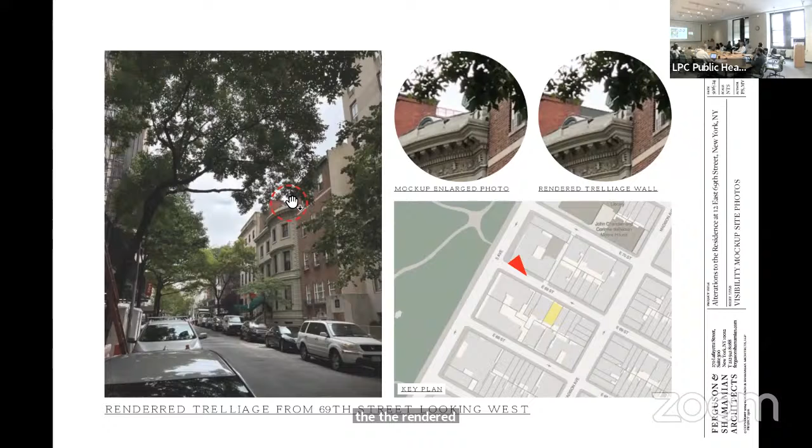Moving a bit closer to the park, across Fifth Avenue, you can see the zoom view of the existing bulk of the proposed bulkhead. Here is the rendered view in detail. We get a little bit of the treillage, and the elevator overrun is that sort of gray finish right there. Again, this is the overall view, so this is exactly how you would experience it in the streetscape. And of course, it's tucked behind these chimneys.

From Madison, when we built the mock-up, we realized there was going to be some visibility of that lattice work and carved it back, so now it's going to have this curved profile. And so we've eliminated the visibility of both these aspects of the screen.

And then finally, that view from East 68th Street. This is from the south between these two buildings that we see on the map, a break in the street wall. And so you get this very limited view through secondary elevations and lots of utility that's happening below.

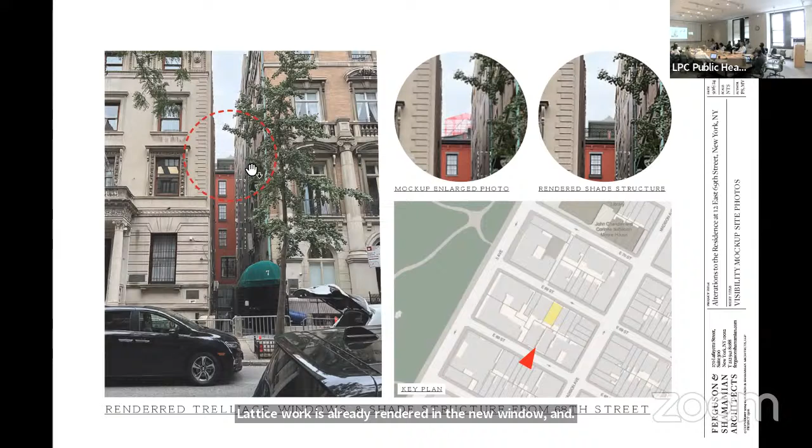This is a rendered view in the overall view. So we have the lattice work already rendered in, the new window proposal, and the relocation of the windows is ghosted in. And then above that, the new garden structures on the rooftop.

There is one little glimpse you get in this exact spot of the outside edge of the relocated windows. Otherwise, that relocation is not visible from the public way. So here it's just ghosted in, showing you the left-hand edge of the new windows.

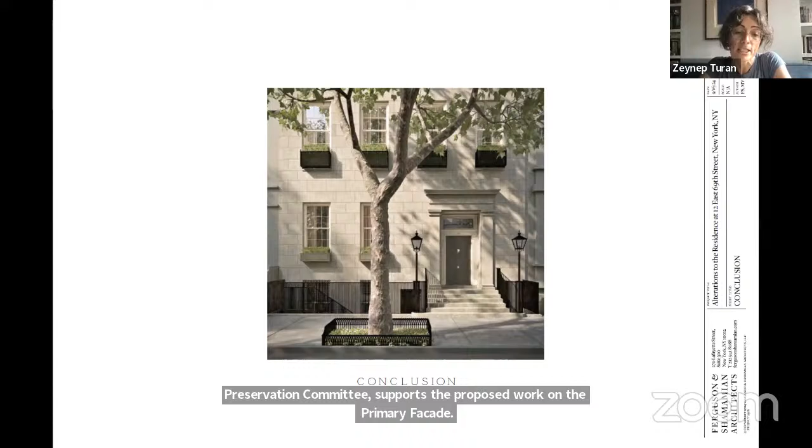Good afternoon, Commissioner. Zeynep Turan here, speaking on behalf of Friends of the Upper East Side. Friends Preservation Committee supports the proposed work on the primary facade, secondary areaway, and rear facade, including the addition of a mechanical attic and new terrace garden. We believe, however, the penthouse, bulkhead extension, skylight, and two metal shade structures create an overly congested appearance on the roof. Though we appreciate the temporary aesthetic of the pitch tent-like structures, we would prefer a less crowded rooftop. Thank you.

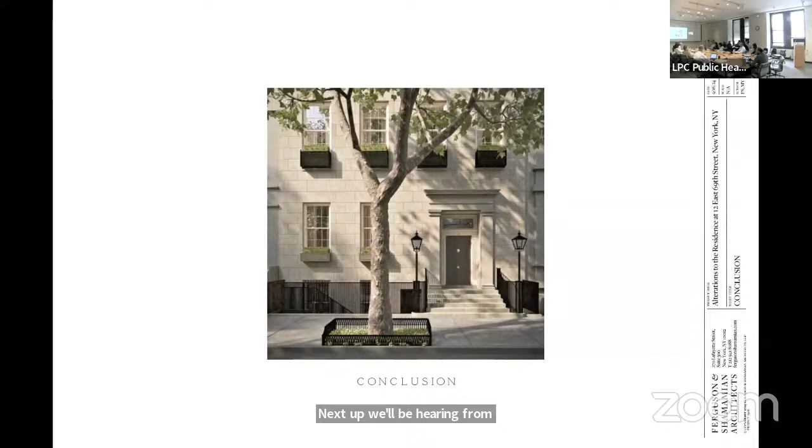Hi, I'm Christina Conroy, reading for Anne Sonian, for the Victorian Society, New York. The Victorian Society is happy to support the applicant's proposal for 12 East 69th Street.

Lowering the front areaway and modifying the existing basement entrance will require removal of only a very small amount of historic masonry. This change, minimally visible from the sidewalk, the depth of the areaway, and the restoration of the relatively solid historic fence, will have no effect upon the overall character of this mansion.

The existing alleyway between the buildings facing East 68th does allow a limited view of the rear facade of 12 East 69th. Because of this, the rooftop shade structures will be partially visible, but we can support this change given that the structures will be set back from the rear facade and have been designed to look like semi-permanent pavilions.

Pavilions such as this, as well as pergolas and awnings, were frequently seen on penthouses on the Upper East Side and are, we believe, in keeping with the character of the district. The other changes to the rear facade, rear yard, and garden wall will not be visible. The changes to the roof bulkhead are unobtrusive.

Finally, we are very pleased to see that the applicants are proposing to recreate the original main entrance. The 1945 photo shows metal and glass doors here, and this type of door is often seen in mansions in this district. However, we feel that the entrance visible in the 1915 photo is much more appropriate for this remarkably discreet mansion. Thank you, Commissioners.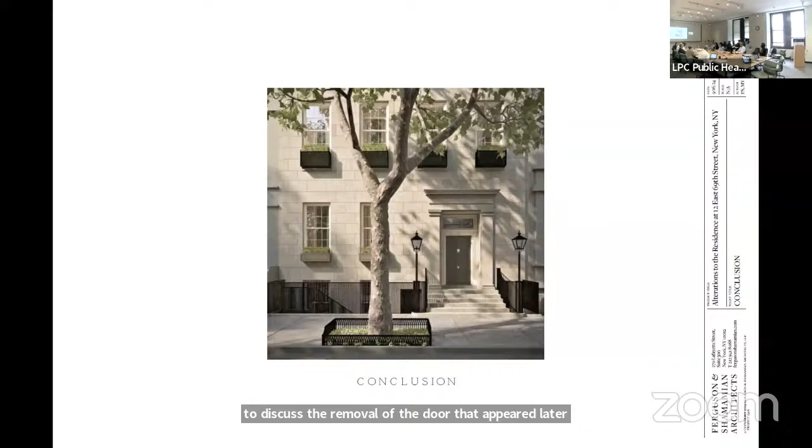It also includes lowering the areaway and modifying a window in that location, which is very deep below grade. At the rooftop, there are additions: shade structures, screen, and elevator bulkhead. There are some incidental views from Fifth Avenue where you see it in the context of chimneys and above trees, and also an incidental view through a limited alleyway on the 68th Street behind it.

And at the rear, we are looking at modifying window openings and installing the deck and the screening around the rear yard. So we'll begin our discussion. Commissioner Lutfi, would you start this one?

I think this project overall is very thoughtfully done, and it's well done. In terms of the entry, the decision to do a lot of restoration is welcome. I don't have a problem with getting rid of the existing door and going back to a 6-panel wood door, which was original to the building.

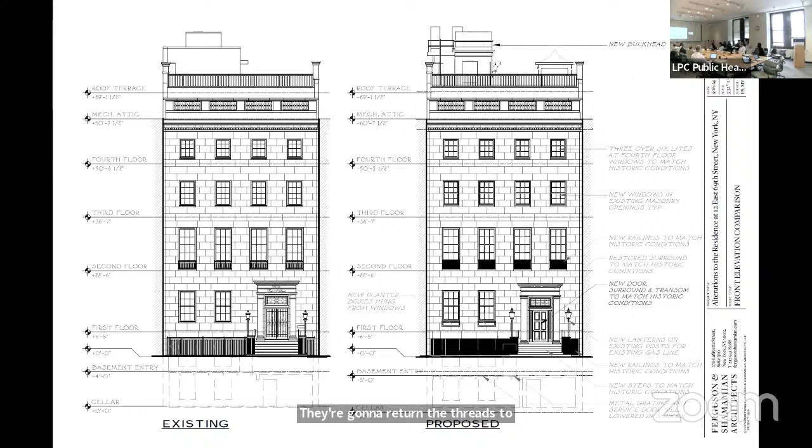And they're doing a lot of good work, as you said, restoring the surround. The door is going to go back to its original height. The transom's going to be restored. They're going to return the treads to their original height, even though they're retaining a step. I'm perfectly fine with the lowering of the floor and the areaway.

Likewise, this is again another rear yard situation where there have been significant incursions into the rear yard, and there's a lot of whatever. There's no green, but I'm fine with the deck. I'm fine really with everything in the rear yard, and on the roof, the decking is great. The reconfiguring of the bulkhead works. I really like these metal canopies, and the visibility is minimal, and I think people will barely notice.

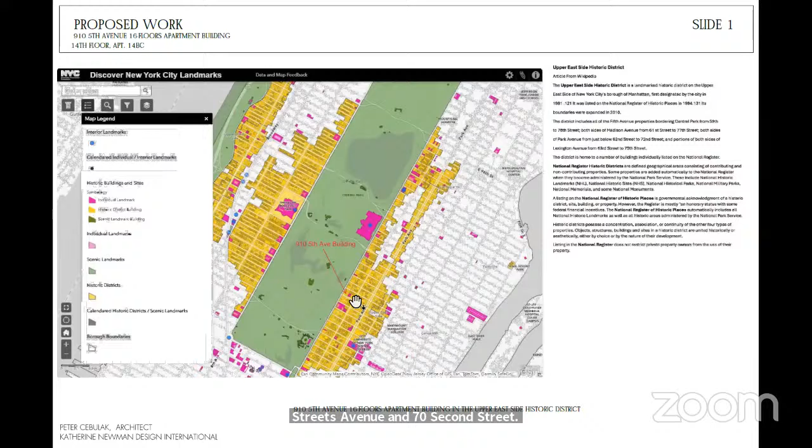The original building was designed and erected in 1919 in neo-Italian style, but unfortunately in 1958 the facade was stripped of its original beautiful limestone and replaced with brick veneer. This is the existing character of the building.

We have two views here, one from Fifth Avenue, showing our activity on the 12th and 14th floor. The subject of this application is building an addition, actually shifting the existing bay windows from the east side to the west side, which is more—okay, this is the view from 72nd Street.

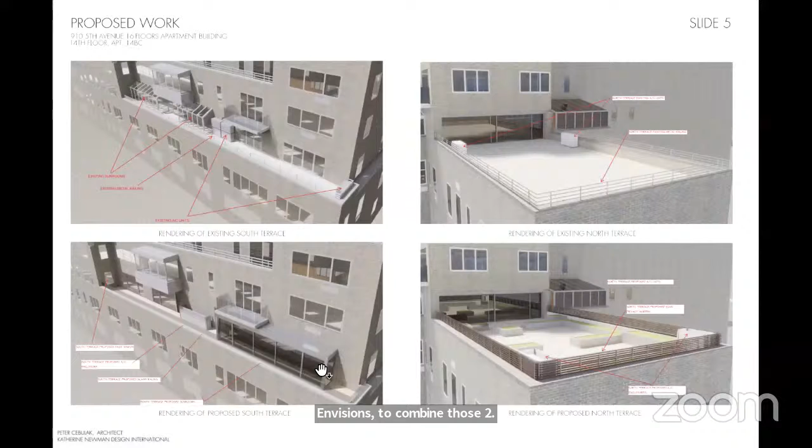Let me move quickly to this slide. On the upper left corner you see the existing condition showing two bay windows on the west side of the terrace. Our proposal envisions combining those two bay windows, shifting them towards the east, which will give extra space to the great room proposed in this location.

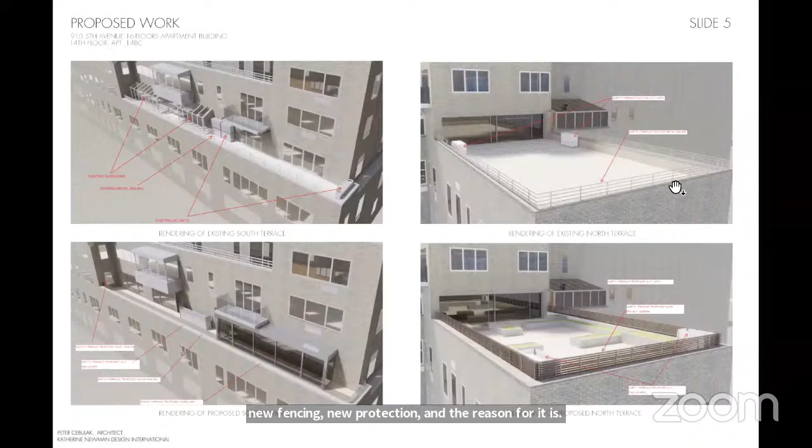On the right side of the slide, you can see the existing rear terrace on the north side of the project, and proposed new fencing, new protection. The reason for it is that the existing railing does not provide security for children.

This is an axonometric view, which shows in dotted line the existing bay windows with a sloped roof, and the new bay window with a more modern design, replacing the sloped glass with a solid top.

We are also proposing replacing the existing railing with a glass railing. And here on this side of the slide, showing the new railing.

This is the existing condition of this project. I want to explain this project envisions combining two floors. We are looking at the 14th floor, and on the 14th floor we see here a bay window on the east side. Moving to the new proposal, this is the staircase coming up from the 12th floor, and this is the primary living space. This plan shows a new bay window.

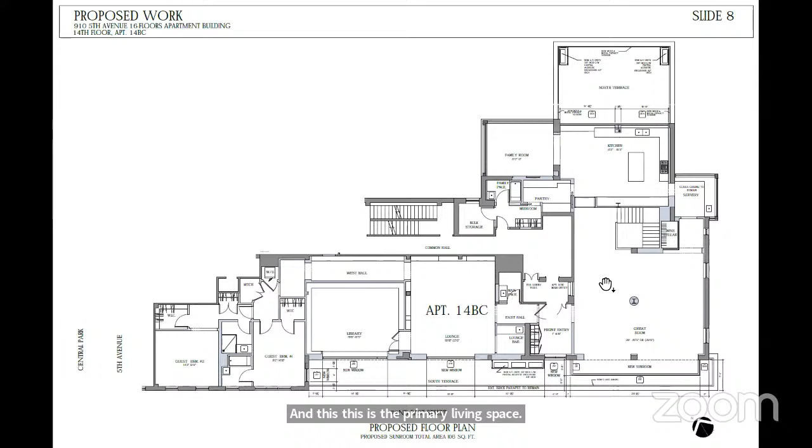This is a comparison of the existing railing on the north side and the proposed railing, more secure and more safe.

This shows the architectural details—that's how the existing bay windows are constructed. This is the proposed one, which is slightly reduced in projection below existing mechanical equipment, with reduced size mechanical equipment and a glass railing.

This corner shows the existing railing the way it's positioned on top of the parapet wall, and this is the slightly set back, new proposed railing. Okay.

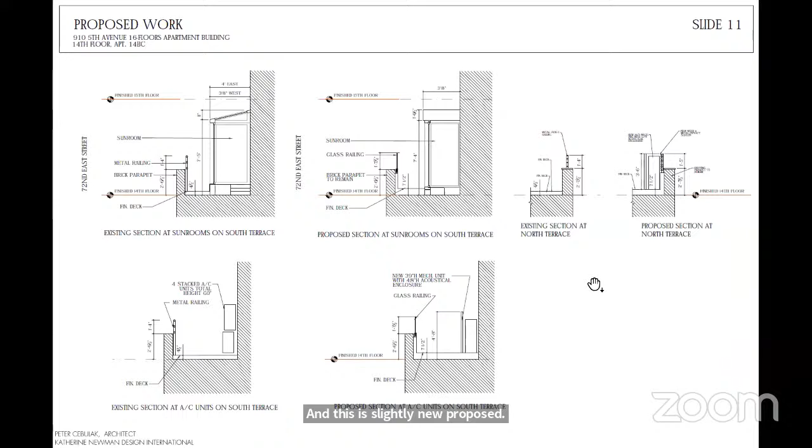This is the existing condition and finishes of the bay window, the way it's constructed today. We are planning to use the same fenestration details in keeping with the character of the building.

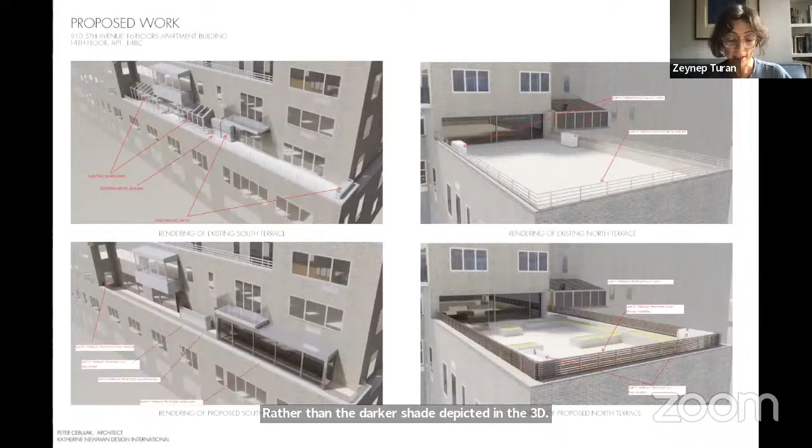Thank you. Hello again, Commissioners. Zeynep Turan here speaking on behalf of Friends of the Upper East Side. While Friends Preservation Committee does not oppose the proposed modifications to the south terrace of this apartment unit, we would like to express our preference for transparent glass used in this new sunroom addition, rather than the darker shade depicted in the 3D renderings. Additionally, we believe that a wood railing for the north terrace is incongruous with the building's architectural style. A glass railing or a metal and glass combination would better maintain the aesthetic consistency of the proposed terrace alteration.

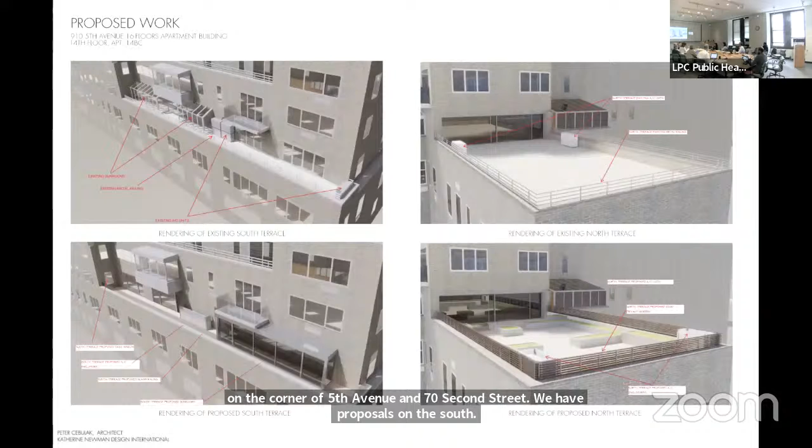So we have on this building at the corner of Fifth Avenue and East 72nd Street, proposals on the south elevation, the 72nd Street elevation, and at the north end of the building facing into the interior of the block. On the south elevation, the proposal is to remove one greenhouse addition at the setback terrace and install another one to the east beneath the balcony, and to modify openings behind the wall where the existing greenhouse addition is located to create single pane windows. At the East 72nd Street side, the proposal includes replacing the metal pipe rail railing with a clear glass railing. At the north elevation and terrace, the proposal includes a wood railing.

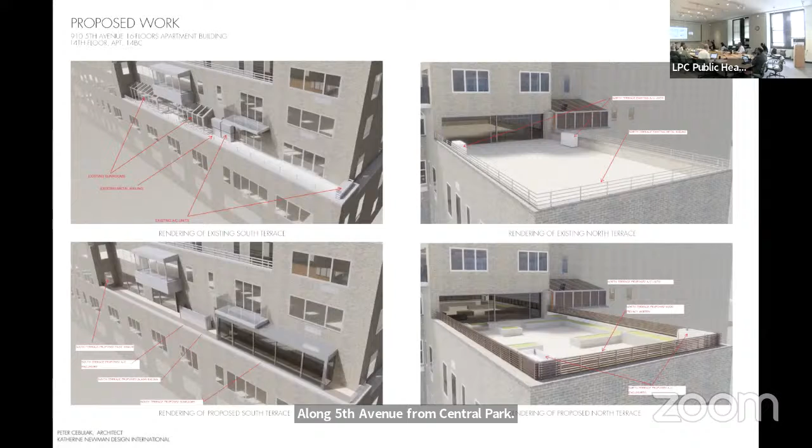I recommend approval with modifications, finding that the existing building is not one for which the historic district was designated. Therefore, the removal of non-original enclosures and portions of the plain brick facade at the setback 14th floor will not eliminate any significant architectural features of the building. The setback location and simple massing of the proposed metal and glass enclosure will help it remain a discreet presence on the building. Only the uppermost portion of the proposed enclosure will be minimally visible from long views along Fifth Avenue from Central Park and points east along East 72nd Street, and the material and finish of the enclosure will harmonize with existing materials and finishes found on this facade, thereby helping it recede from view. The new openings at the setback terrace facade, where the existing enclosures are being removed, will not be visible from public thoroughfares and will harmonize with the existing fenestration pattern in terms of size, material, and finish.

And I recommend that the existing railings be retained at both the front and rear terraces, with a screening—either glass or wood screening—installed inside of the railings. Please work with staff on the details.